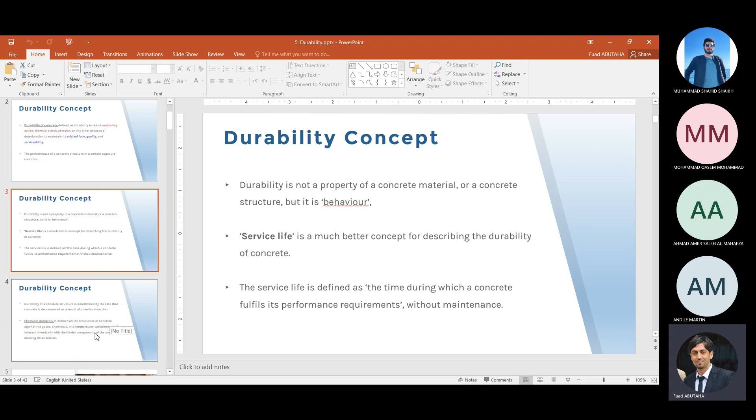But there are some properties that give you an idea about the durability of concrete, like water absorption, rapid chloride permeability tests, and other tests that can give you an idea how durable this concrete is.

So if there is any problem with the concrete, the concrete starts to deteriorate. What is deterioration? Deterioration is the defect that has occurred over a period of time on the concrete. There are many reasons that make the concrete deteriorate, resulting in the structure ending up with failure. If there is nothing happening to the concrete, if it is not exposed to an aggressive environment, then the concrete is supposed to stay in its original shape. Nothing will happen to the concrete over time.

But if there are any defects or reasons that make the concrete deteriorate, then the concrete will start changing. The original shape and quality of the concrete will start to change, and deterioration will happen to the concrete and end up with structure failure.

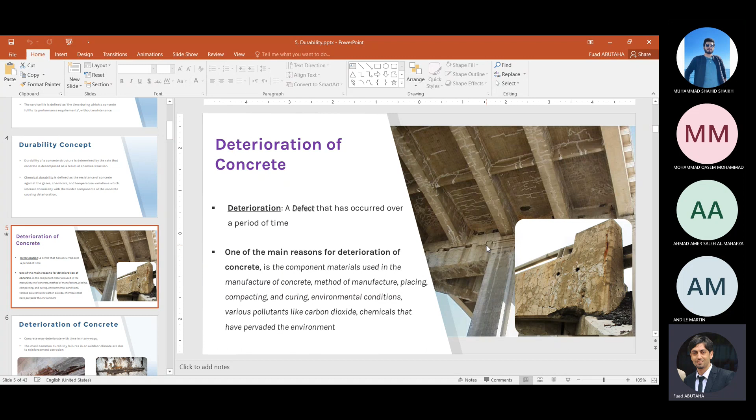And the most common deterioration that happens to concrete is the corrosion of the steel bars. There are many reasons that make the steel bars corrode in concrete structures. We will see some causes and factors that result in concrete structure failure as a result of the corrosion of the steel bars. So concrete may deteriorate over time, and the most common durability failure is the corrosion of the reinforcing bars.

There are also other factors. If the concrete is exposed to aggressive environments, chemical attacks, if the concrete is exposed to water containing sulfates, acids, these chemicals will start to attack the concrete components and result in deterioration of the concrete and concrete failure.

So any concrete failure will be the result of two major factors: it can be either external factors that affect the concrete structure, or internal factors that result from the concrete ingredients themselves. If there is any defect or problem with the concrete ingredients, the aggregates, the cement, the quality of the cement, the quality of the aggregate, if there is any problem with the concrete ingredient materials inside, this is also a factor and a potential for concrete deterioration and concrete failure.

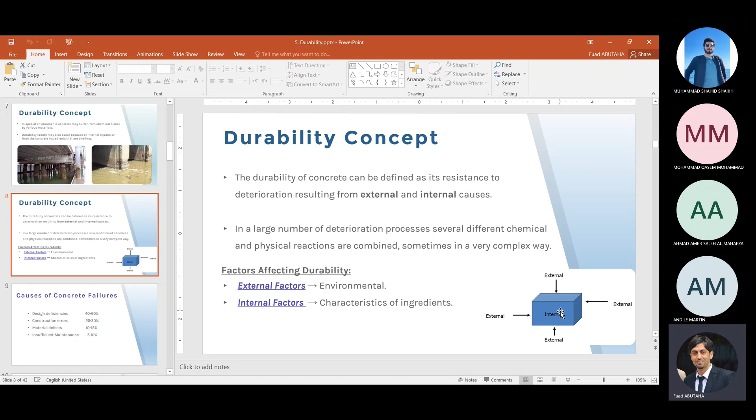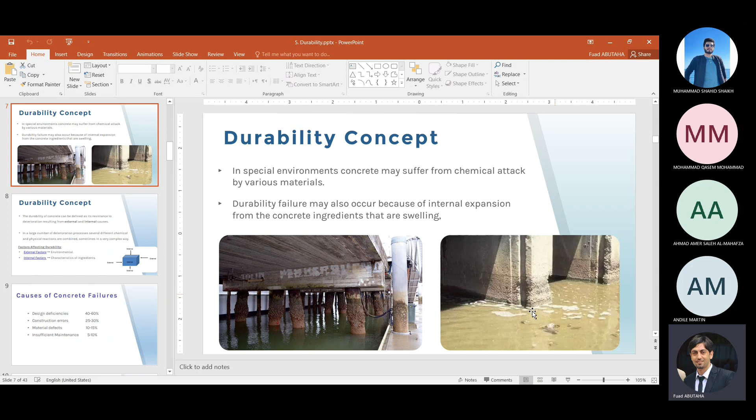External factors are, for example, if there is any attack and the concrete is surrounded by aggressive environments, this could also be a reason and cause for concrete failure.

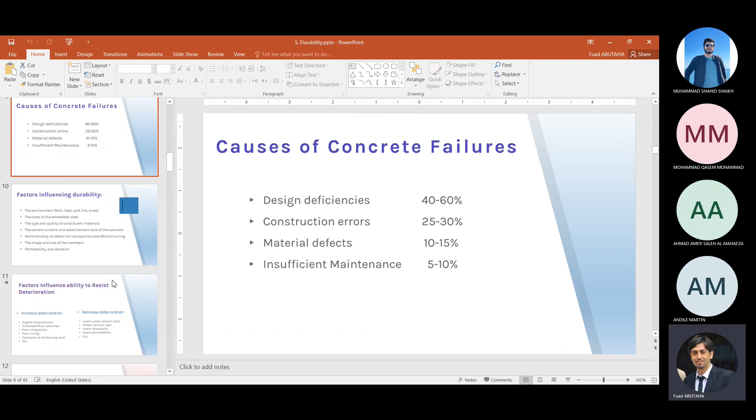So what are the factors? Here is a list of factors that may result in the deterioration of concrete: the external environment, the cover of the embedded steel. Here are the concrete structures and the steel bars, and there is a cover whose purpose is to protect the steel bars. If there is insufficient cover, or a problem with the concrete quality of this cover, it will allow water and chemical attack to penetrate and reach the steel bars. Then when the steel bar gets in touch with moisture and water, corrosion will start to happen.

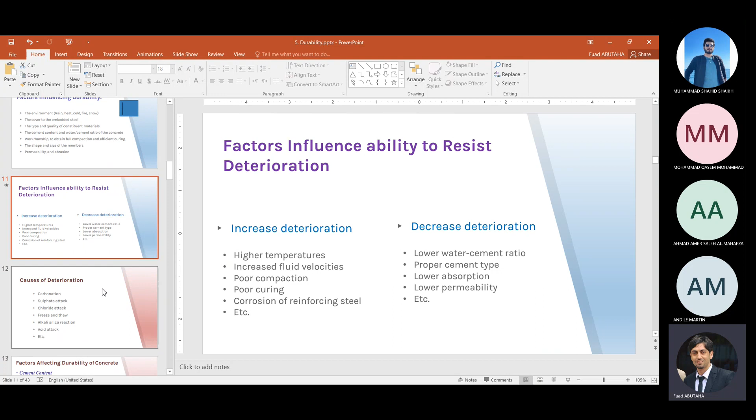The cement content, the water-cement ratio, these are also internal factors. The mix design of the concrete, the shape and size of the members, and permeability, abrasion, etc. So these are examples of the factors that may end up causing concrete failure as a result of deterioration.

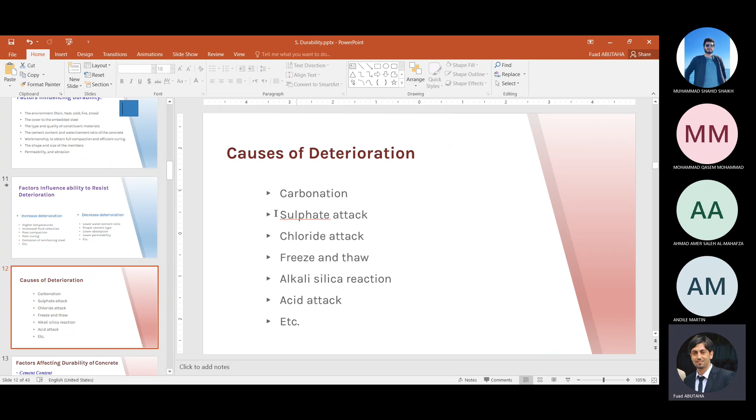Causes of deterioration also - this involves external factors, and some internal ones. Carbonation, sulfate attack, chloride attack, freeze and thaw, alkali silica reaction, acid attack, and so on. Some are external, some are internal - carbonation, sulfate attack, and chloride attack are external factors, while the alkali silica reaction is an internal factor, because it happens when there is a high alkaline component in the cement, which reacts with the silica in the aggregates, and deterioration starts.

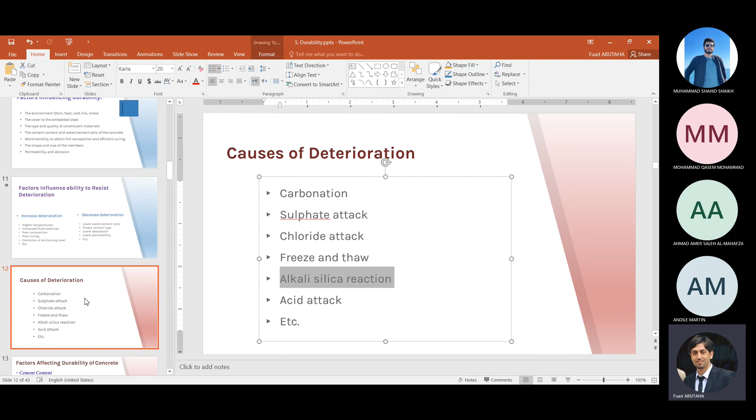So you need to know the factors affecting the durability of concrete in terms of the cement contents, the aggregate quality, the compaction, the curing, permeability, and moisture. There are so many factors. You don't need to know only the list of factors, but how each factor affects the durability of the concrete.

Compaction - how poor compaction will make the concrete deteriorate or contribute to concrete failure. Compaction is one example of a factor that may affect the durability of concrete. How? Because poor compaction will result in voids. What is the purpose of compaction? We vibrate the concrete in order to allow the concrete mix to fill up all the voids and spaces, remove the bubbles, and make the concrete more dense.

So if there is poor compaction, if the concrete is poorly vibrated, it will end up with voids - the concrete doesn't reach and fill all the spaces. Segregation may happen, and all this will allow water and moisture in. The existence of voids will allow water to penetrate and reach the steel bars, leading to concrete deterioration.

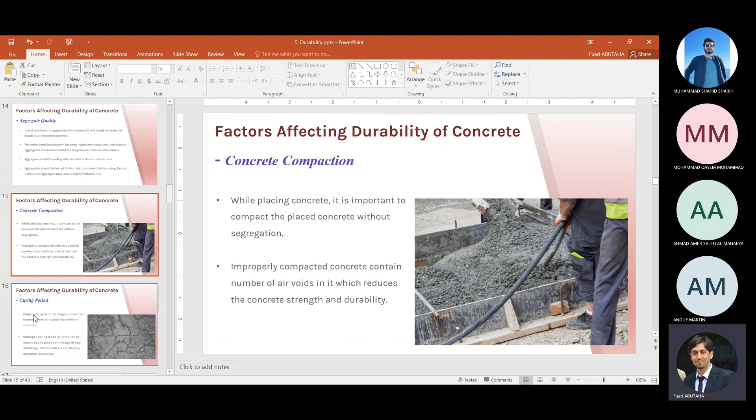So cement contents, water-cement ratio, aggregate quality - all these can be either internal factors or processing factors, like when we do the concrete casting, curing is also one of the processing factors.

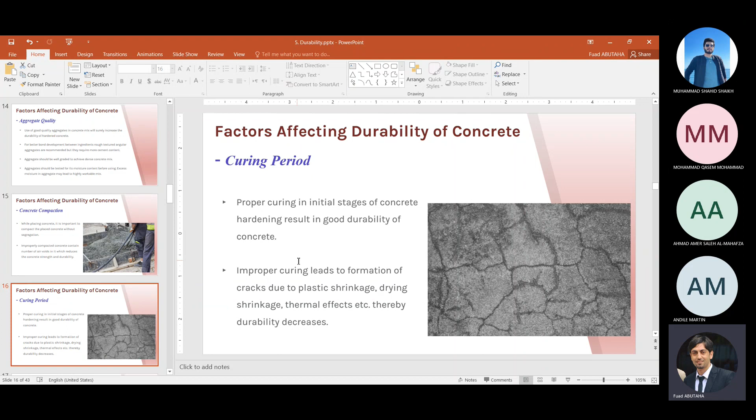This is how the question is coming: what are the factors, explain how the cement content, how curing will affect the durability of concrete. So you need to understand how curing, how the cement content, how the quality of the aggregate affect the durability of the concrete.

So we have so many factors. In order to avoid or improve the durability of the concrete, you need to make sure that the concrete can stay in its original shape with original quality for a long time. So you need to increase the service life of the concrete. How to improve the durability of the concrete? How to improve the service life of the concrete?

By considering the factors that affect the durability of concrete, you need to list all the factors and study how each factor affects the durability, how each factor affects the quality of the concrete. Since you know how this results in poor quality, you need to try to mitigate and avoid the effect of each factor.

For example, if I ask you how, among different factors affecting the durability of concrete, aggregate quality can contribute to the deterioration of the concrete or contribute to concrete failure, and how to avoid the effect of the aggregates on the

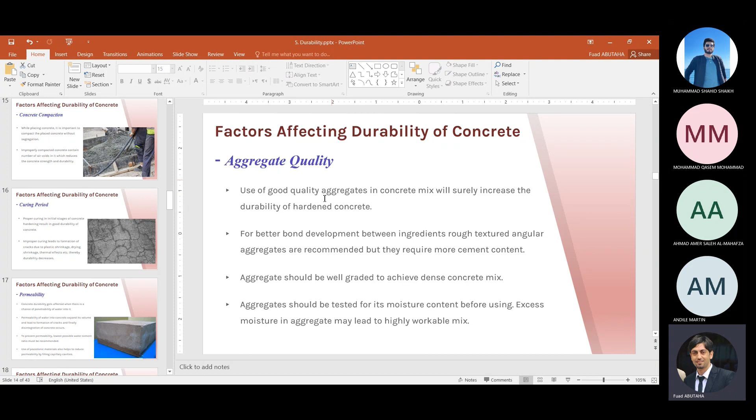There are 3 methods to mitigate and avoid the alkali silica reaction as a result of poor aggregates. We have 3 mitigation methods to avoid or minimize the potential of alkali silica reaction happening in the concrete. We'll get to know these when we reach them.

Abrasion is also one of the factors. Moisture, also permeability - how permeable is the concrete? So permeability is also one of the factors that affects the durability of the concrete.

How permeability can affect the durability, and how we can improve the concrete permeability in order to avoid the deterioration of the concrete - but first, we need to understand what permeability is. Permeability is actually how much and how easily water can go and penetrate the concrete.

How to measure the permeability is by the most common test that we do in the lab to determine or get an idea about how permeable the concrete is - the water absorption test.

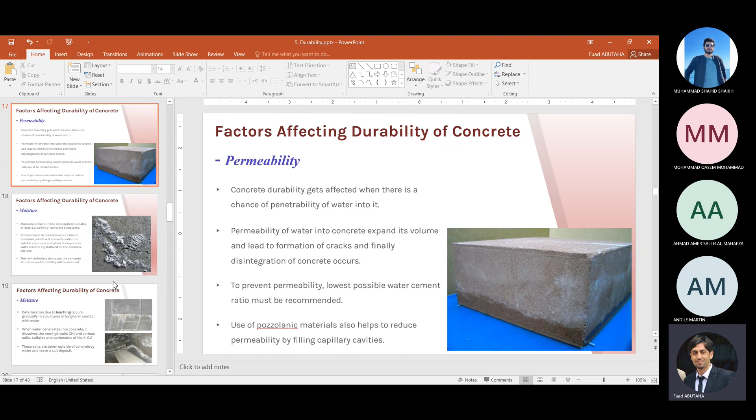So how does this happen? Because the particle size of the cement will be different than the particle size of this material. If we take silica fume as an example, the particle size of silica fume is 100 times smaller than the particle size of cement. So these small particles start to fill in the voids between the cement particles, making the concrete more dense and compacted, which contributes to preventing and avoiding the permeability of the concrete.

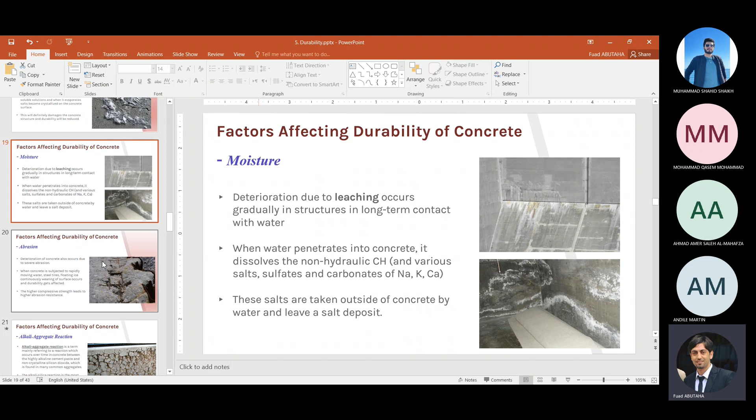Moisture is also one of the factors you need to read and see how it can contribute to the deterioration of the concrete. Abrasion, as an external physical factor, can also end up causing concrete deterioration.

This is an internal factor: the alkaline aggregate reaction, or alkali-silica reaction. This reaction happens inside the concrete when the alkaline from the cement, the high alkaline cement, starts to react with the silica in the aggregate. We already discussed this one - so when there's a problem with the source of the aggregate, the aggregate contains reactive silica.

This reactive silica will start to react with the alkaline existing in the cement. So the alkaline will react with the silica from the aggregates, and we get the alkaline silica reaction.

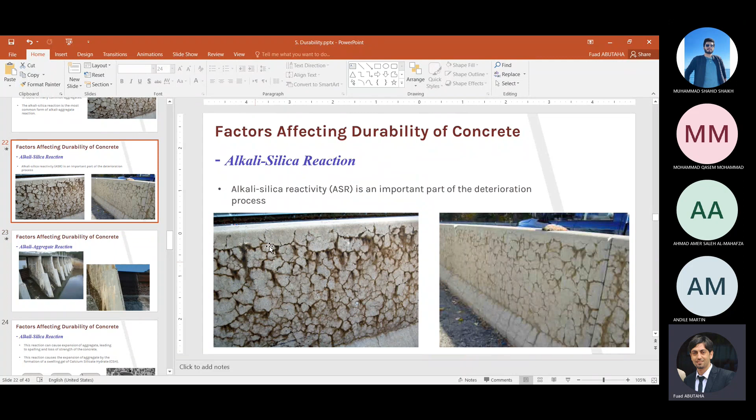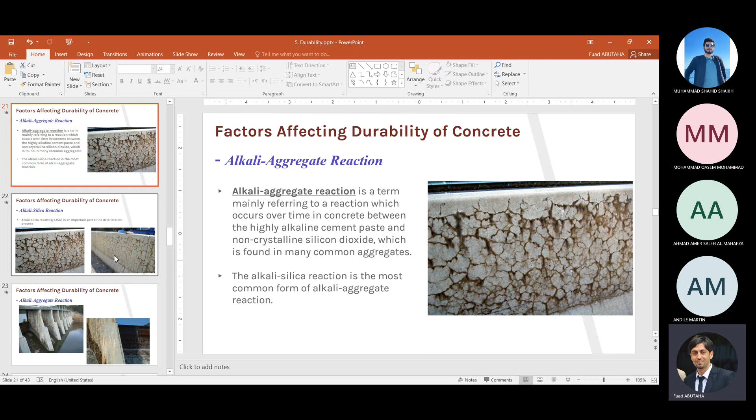What does this reaction do and how can it affect the quality and durability of concrete? As a result of this reaction, you end up with cracks, maps, and you might find some gel coming to the surface of the concrete.

As a result of this reaction, we start to see some components forming, and the volume of the result is higher than the original volume. So the volume inside the concrete, specifically inside the aggregates, keeps getting higher and higher, growing over time as a result of this reaction.

Then it starts to push the surface, push the material, and if there's a volume increase, we start to see cracks inside the concrete. It ends up with these kinds of shapes, and it's definitely a problem - the volumetric change, the existence of the crack.

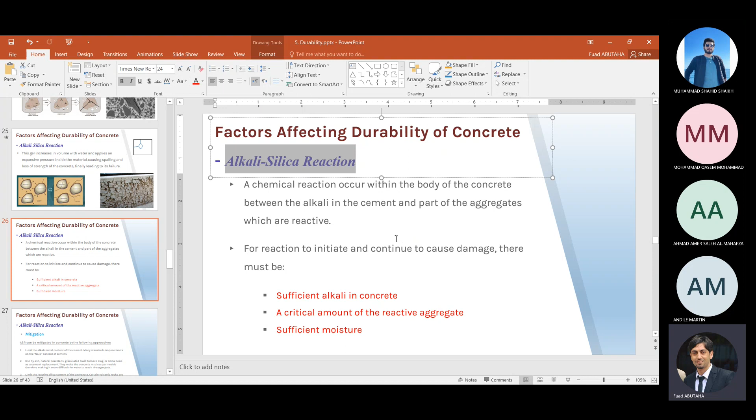If you know what makes this reaction happen - it occurs because the high alkaline components in the cement react with the high silica component from the aggregate, along with the existing water - it will start reacting.

So how do we avoid it? We need to limit the alkaline component. We have alkaline from the cement and silica from the aggregate. So we need to limit the alkaline metals or alkaline component from the cement, and also limit the silica from the aggregates.

We also need to avoid the existence of water, since this reaction starts to happen with water present. How do we avoid the existing water? By using mineral admixtures - slag, silica fume, supplementary cementitious materials, pozzolanic materials. This makes the concrete more compact and prevents water and moisture from reaching the concrete ingredients, which would otherwise trigger this reaction.

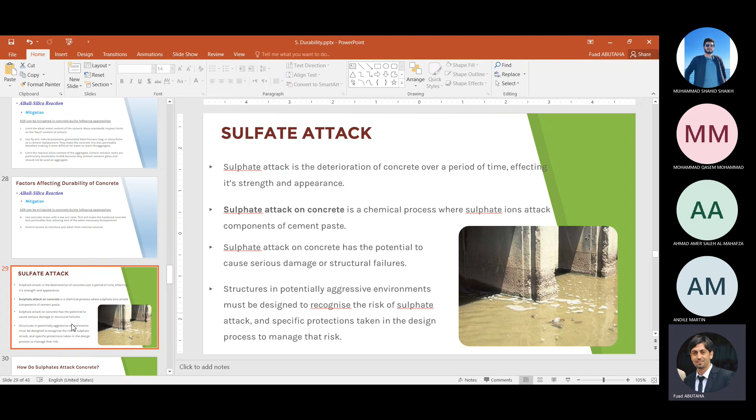Sulfate attack is also one of the external factors that affects the durability of concrete. When concrete is surrounded by an aggressive environment containing sulfate, the sulfate starts to attack the concrete ingredients, ending up with concrete deterioration and failure.

You need to know how sulfate attacks the concrete and what the source of these sulfates is. There are two types of sources of sulfate that attack the concrete ingredients: internal source or external source.

Internal source - for example, when the water used during the concrete mix contains some salt, or the Portland cement might be over-sulfated. The material or cement already used is over-sulfated, or the water, or whatever.

Example of external source - it's not part of the concrete ingredients, meaning the source is outside the concrete. It can be from the soil, the groundwater, or industrial waste water. Any source of sulfate can exist in the soil or underground, or groundwater, when the concrete is always exposed to this aggressive environment.

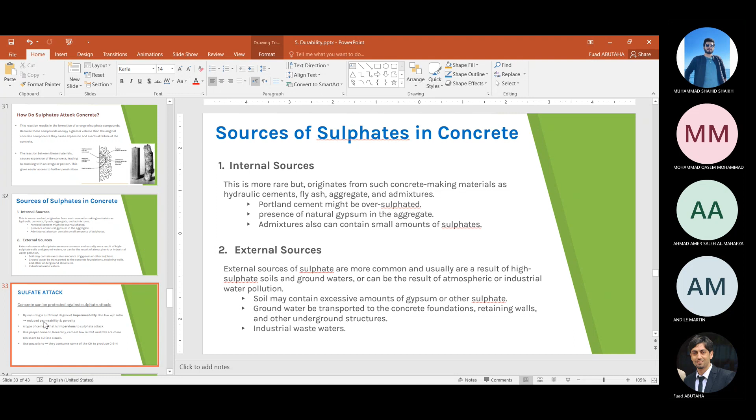The concrete is exposed to groundwater that contains a high amount of sulfates, and this source of sulfate starts to attack the concrete components. So how do we protect the concrete from any sulfate attack?

Before this one, the first thing is reduce water to cement ratio. This is the key answer of any problem, the solving of any problem - how to generally protect the concrete, how to generally improve the quality of the concrete. Always write reduce water to cement ratio, because this is the main reason. For example, ensuring sufficient degree of impermeability, use low water to cement ratio to reduce permeability and porosity - I need to reduce the voids. One of the methods to reduce the void is reducing water to cement ratio.

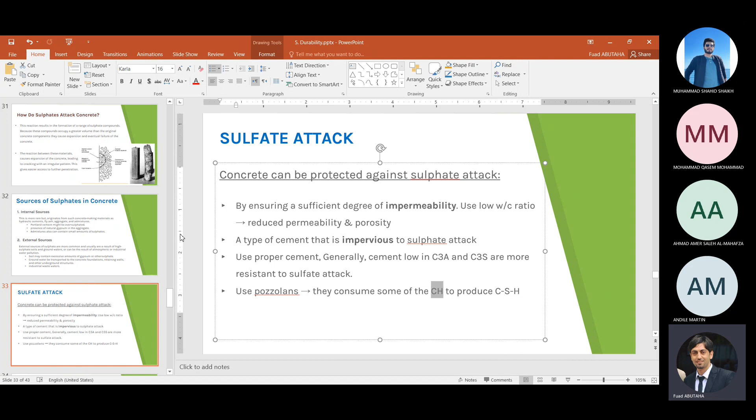The other method is to use pozzolanic filler material, mineral admixture. This one will contribute when it's consumed, the calcium hydroxide is converted to calcium silicate hydrate, and also can contribute by the filling ability or filling capability to fill all the spaces inside the cement matrix or cement paste. This is how the sulfate attack results in concrete deterioration and the failure of the structure.

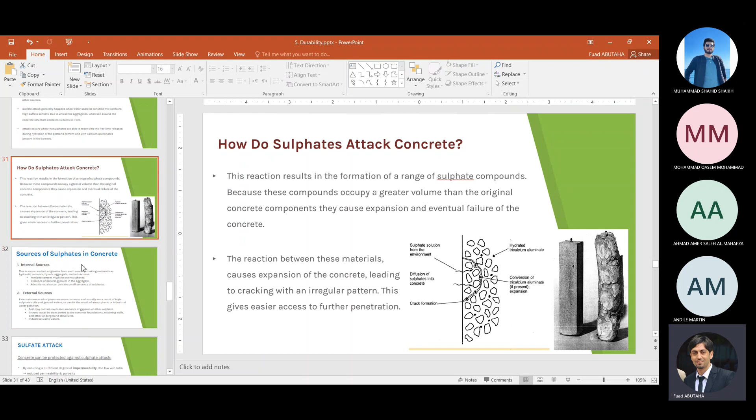The other deterioration of concrete is as a result of corrosion. If we define what is corrosion, ASTM actually defined corrosion as the chemical or electrochemical reaction that happens between materials, usually metal materials, and its environment, that produces a deterioration of the metal material and its properties. So corrosion of steel reinforcing is a major problem influencing the long-term performance of the concrete structure, and this is actually the most common reason of concrete failure.

So reinforced concrete will begin to slowly corrode when exposed to a natural environment. For steel embedded in concrete, corrosion results in the formation of rust, which has 2 to 4 times the volume of the original steel. As a result, there is rust, and the outcome volume of this reaction is actually higher than the original volume of the material.

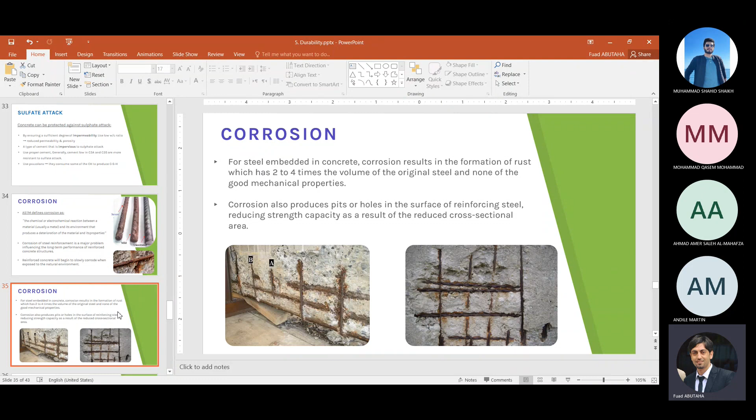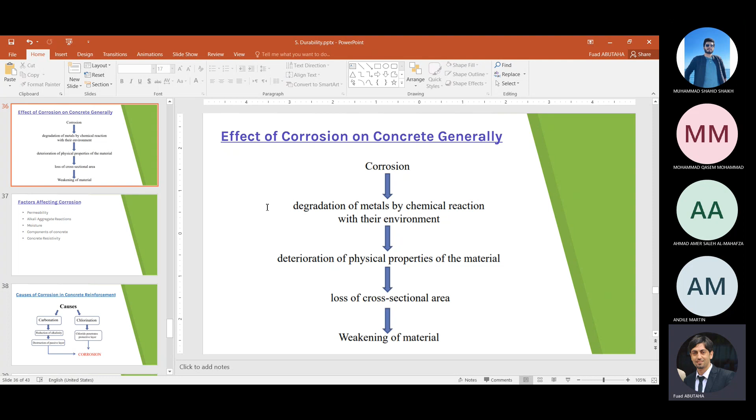So what are the reasons for starting corrosion in the concrete? There are many reasons. The most common two reasons here are carbonation and chlorination. These are the reasons that make the concrete corrode, that make the steel corrode. And what are the factors that also make corrosion happen?

We have permeability. Now it becomes clear that permeability - the high permeable concrete - is the high potential for water to go and penetrate the concrete, reach the steel bars, and corrosion will start.

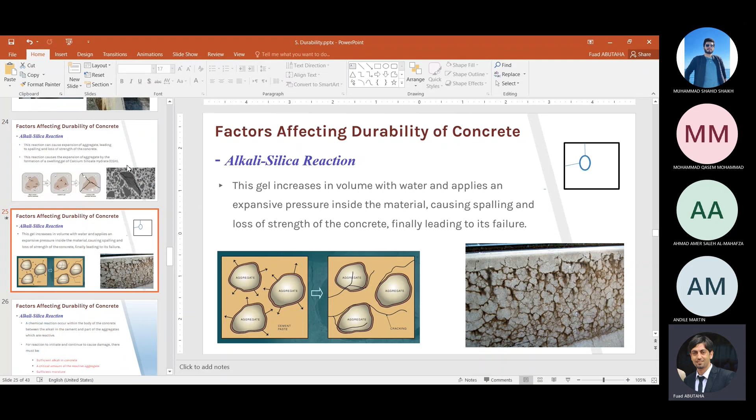Alkali aggregate reaction - when there's alkali aggregate reaction, it will end up with cracks and voids. This will allow the water to penetrate, helps the water to penetrate and reach the steel bars. Corrosion will start as a result of this reaction.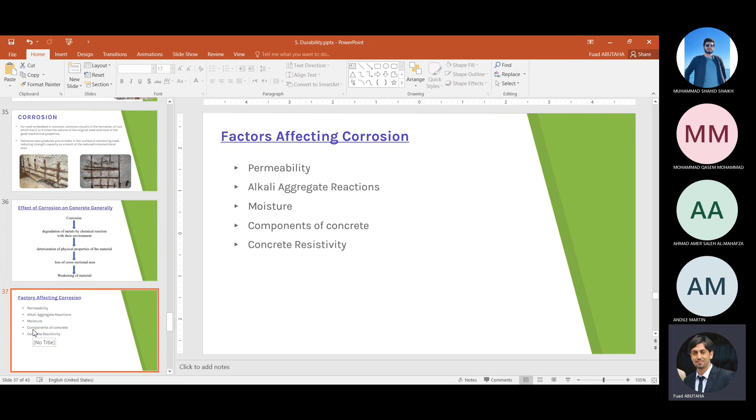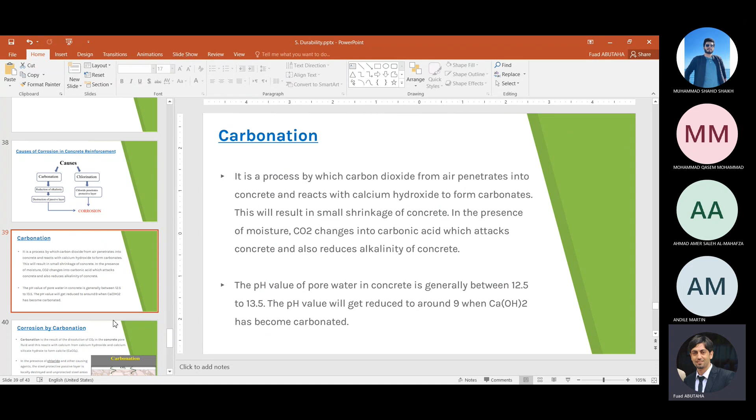The moisture also is a component of the concrete's resistivity - how much the concrete can resist or block water from penetrating. There's another factor, carbonation, which is also one of the reasons that makes the concrete deteriorate or contributes to corrosion. Carbonation is the result of the dissolution of CO2 in the concrete pore fluid, and this reacts with the calcium, so carbonation will start to react with the concrete ingredients.

So in the presence of chlorides and other causing agents, the steel protective passive layer is locally destroyed.

There is one thing here: when we have a concrete structure, the concrete is a composite material - or the concrete structure is a composite material of concrete and steel bars. As we discussed before, there is a bond in the concrete. We are using aggregate, so there is a bond between the aggregate and the cement paste, and this bond is essential to protect the concrete, essential to reflect the quality of the concrete. So the bond between the aggregate and the cement paste is important - it's one of the three main factors that reflect the quality of the concrete.

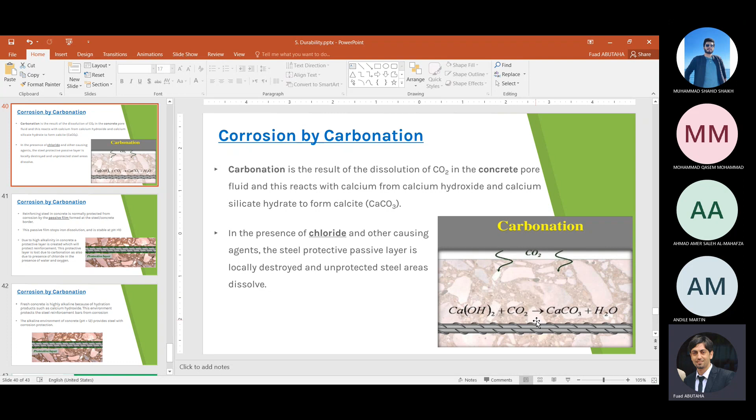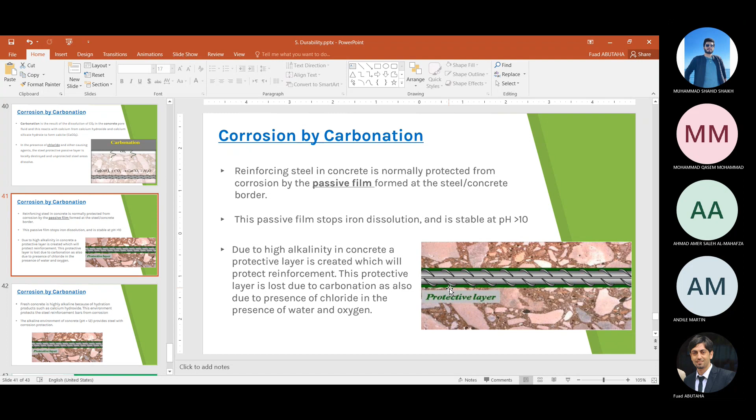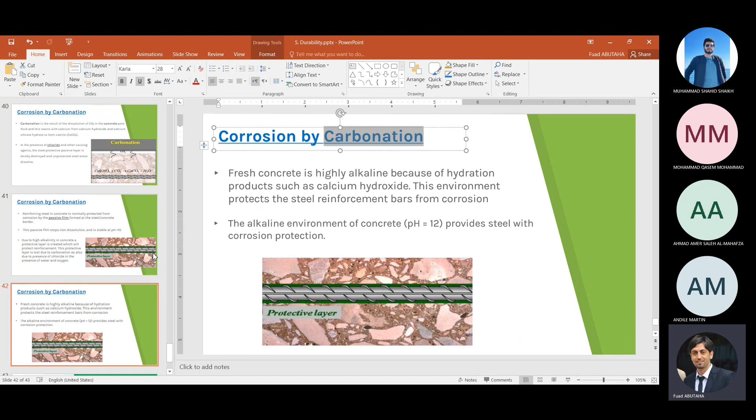So the passive film will start to be destroyed or affected when carbonation reaches it. When carbonation reaches, it converts the environment and reduces the pH value, which destroys and affects the protective layer. The purpose of this layer is to protect the steel from corrosion. If this passive film is already destroyed as a result of low pH value, then it becomes much easier, higher potential, for the steel bars to corrode. Corrosion starts to happen as a result of the carbonation and the existence of CO2.

So fresh concrete is highly alkaline, meaning it has a high pH value. Because of hydration products such as calcium hydroxide, this environment protects the steel reinforcement bars from corrosion. This high alkaline environment is good for protecting the steel. But if the alkaline value reduces, reflected by the pH value, when pH is reduced lower than 12, lower than 10, it can reach down to 7 or 5 - the lower it goes, the lower the quality of the passive film, and the steel bars will no longer be protected from corrosion. So corrosion will start.

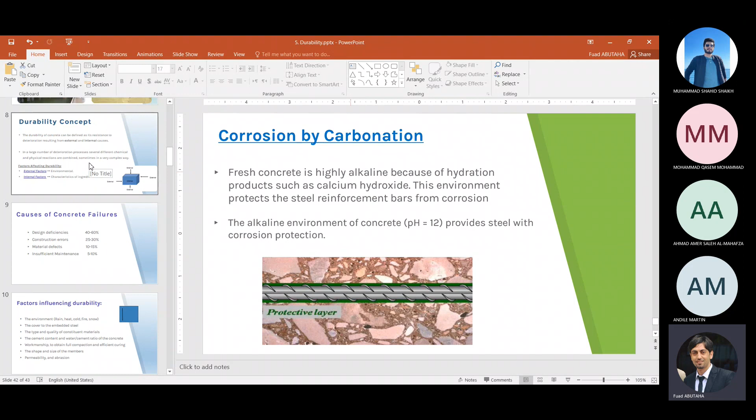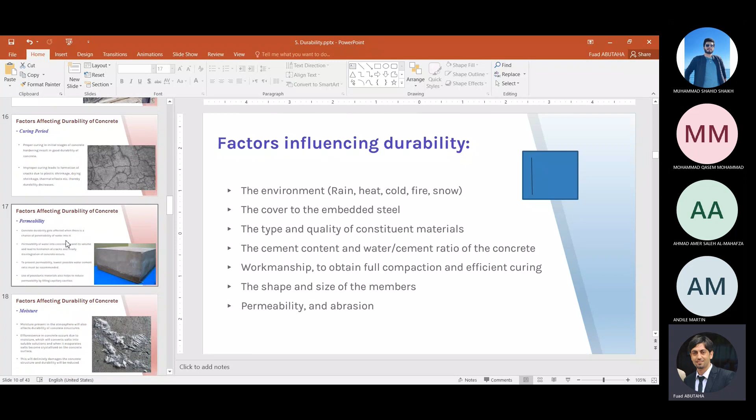So this is actually the end of the durability topic. We defined durability, and you need to know the durability factors that affect the durability of concrete. We have so many factors, starting with processing factors, external factors, internal factors, permeability properties. All of this is so many things that affect the quality of the concrete. You need to cover all these factors - it's not only listing them.

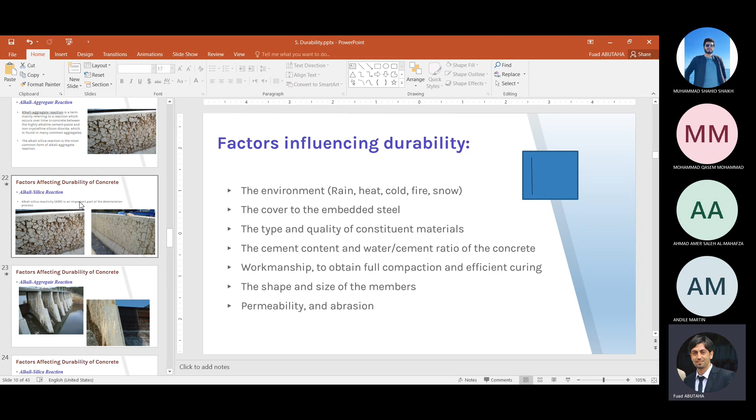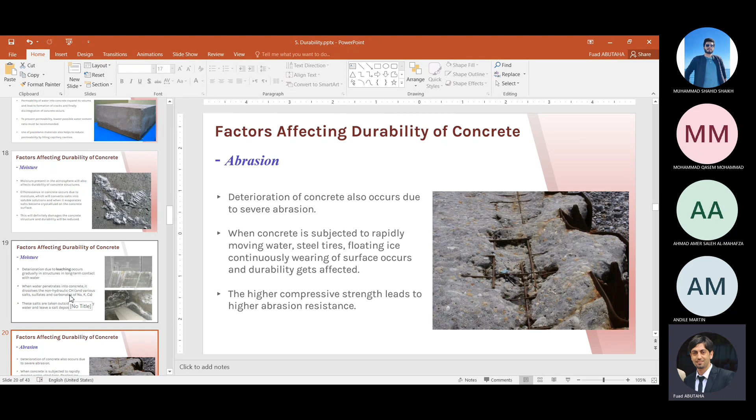The question would not simply be 'list the factors that affect the durability of concrete.' No, it will be asking what is the fact - for example, the quality of the aggregate is affecting the durability of concrete. Briefly discuss how the aggregates affect the durability of concrete and how to improve and avoid deterioration as a result of the aggregate, as an example, or corrosion, sulfate attack, water cement ratio.

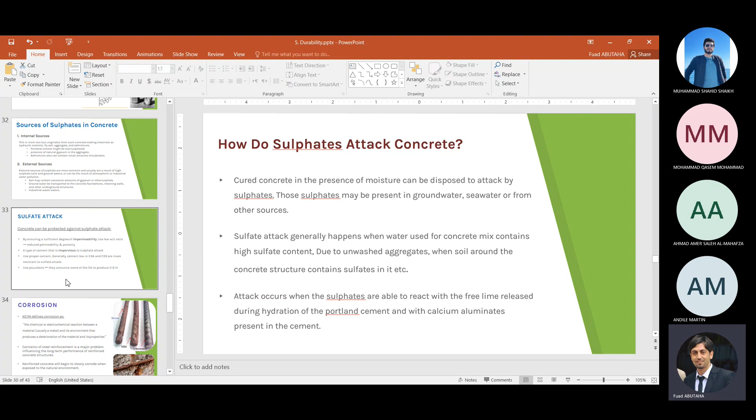And you need to know how to protect and improve the durability of the concrete. The first answer without thinking is reducing the water to cement ratio. If you don't know the answer of any question, just write 'reduce water to cement ratio.' Okay, so we'll stop here for today.